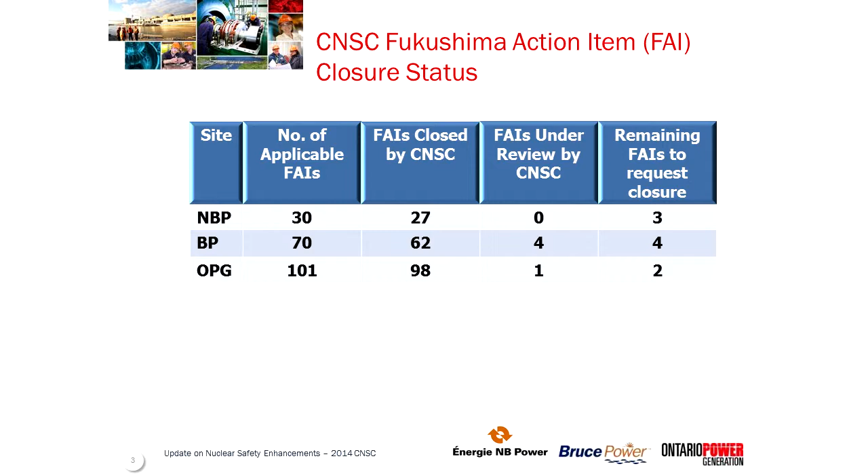We approached the lessons learned from Fukushima in a systematic way, guided by the CNSC and national and international common strategies. The industry is conducting evaluations of the potential external hazards at our plants, design basis and beyond design basis. While we recognized that our plants were safe, improvements could be made to be able to respond in the extremely unlikely event that all of our installed backup equipment is not available.

Therefore, we have added portable emergency mitigating equipment, pumps and generators, to add an additional layer of defense. This installed equipment gives us the capability for portable pumps to add water to the boilers, irradiated fuel bays, heat transport and moderator systems to cool the core, or portable electrical supplies to repower critical instrumentation in the event of a beyond design basis accident. We are adding more equipment to enhance our capability and are installing quick connects to streamline the deployment of the portable equipment and enhance containment protection.

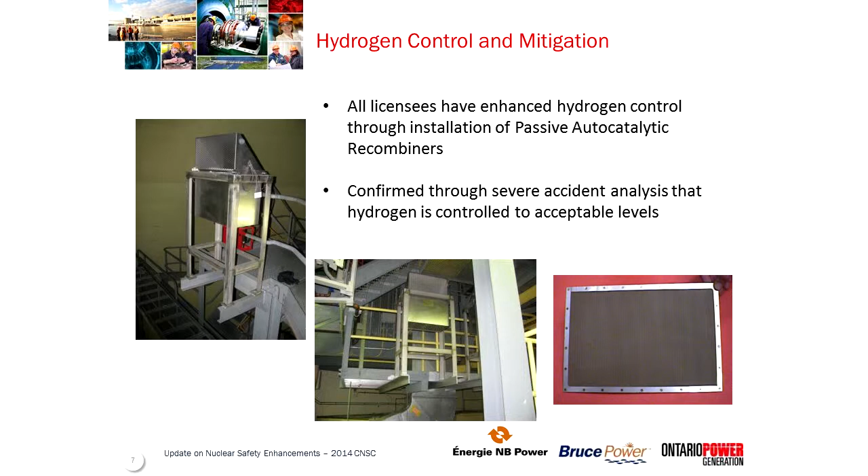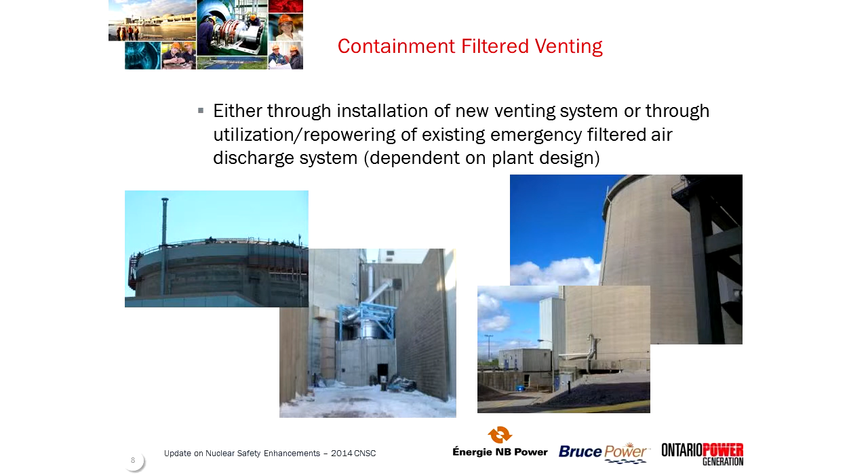Containment integrity is preserved either through the installation of new venting systems, the Point Lepreau containment filtered venting system is shown here on the left, or through utilization or repowering of the existing venting systems, such as the emergency filtered air discharge system, or the Pickering EFADS, shown here on the right. Containment pressure control and cooling is also preserved through SAMG actions, and for some sites, through repowering containment air cooling units.

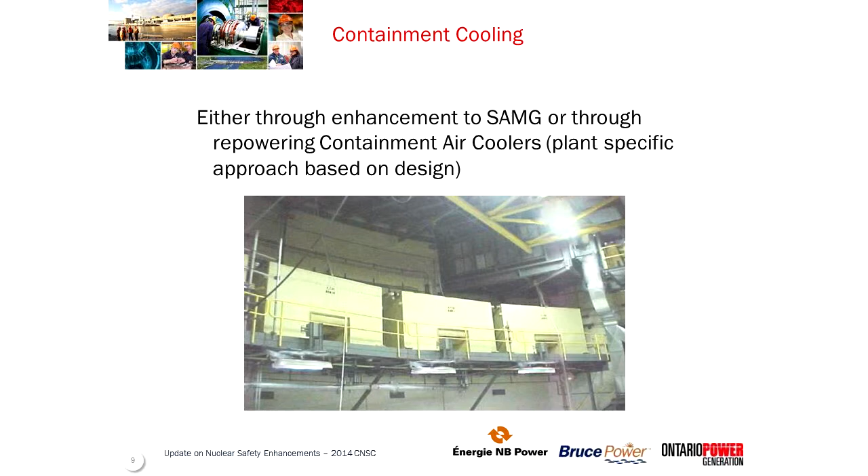All of the improvements we are placing in service are being tested through training and emergency preparedness drills and major exercises. Bruce Power conducted a major exercise, the Huron Challenge, in September of 2012 with over 50 organizations participating.

In May of this year, OPG completed Canada's largest nuclear emergency exercise with more than 1,000 participants from 54 federal, provincial, and municipal agencies. The primary objective of this exercise was to assess the integration of nuclear emergency plans for those agencies that would be required to respond in the event of an accident. OPG is planning to return to a CNSC meeting in November of this year to provide the Commission with an overview of our findings.

At all sites, emergency mitigating equipment drills and severe accident management drills are being added to the drill program. I mentioned two major exercises being complete, the Huron Challenge at Bruce, and Exercise Unified Response at OPG Darlington. But further drills are planned with a Beyond Design Basis drill at Pickering scheduled for the fall of 2014, and a major exercise at Point Lepreau, Exercise Intrepid 2015, which is planned for November 2015.

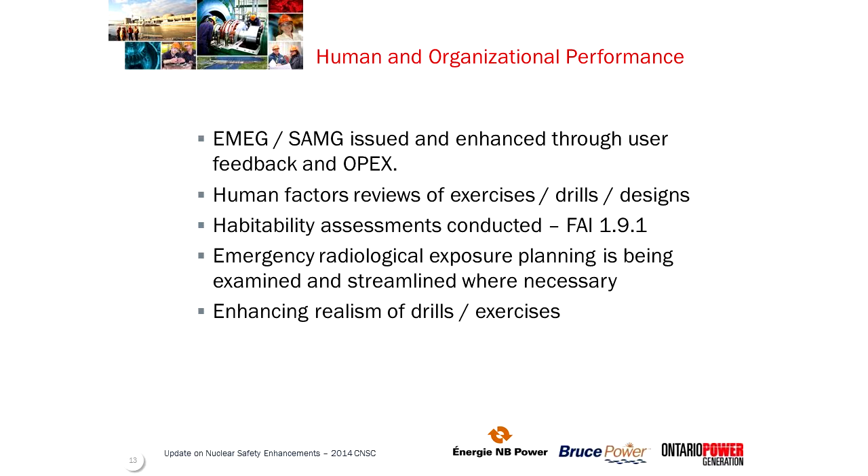We have also recognized the importance of decision-making processes as we transition from a design basis scenario to a beyond design basis. In such cases, we transfer from a rule-based operating regime to a knowledge-based response, basically from procedures to guidelines. Three elements feed into the prioritization and decision-making process that must be used as we make this transition: critical thinking, a bias towards action, and the authority to act.

We are continuing to work with leadership at the stations to ensure that we provide opportunities for them to practice and discuss this important aspect of accident response. We have developed and are continuing to support this with tools, training, and exercises. Our experience has been that staff are very receptive, and they've been providing us with suggestions for further enhancements, which we are implementing.

The Canadian nuclear utilities are providing important inputs to the continuing evolution of practices and regulations, building on the lessons learned. CANDU Industry Integration Team, or the CIIT, which is coordinated through the CANDU Owners Group. This team facilitates working closely domestically and with our international CANDU partners and gain from their perspective. We have conducted benchmarking visits and assessments to capture OPEX and lessons learned.

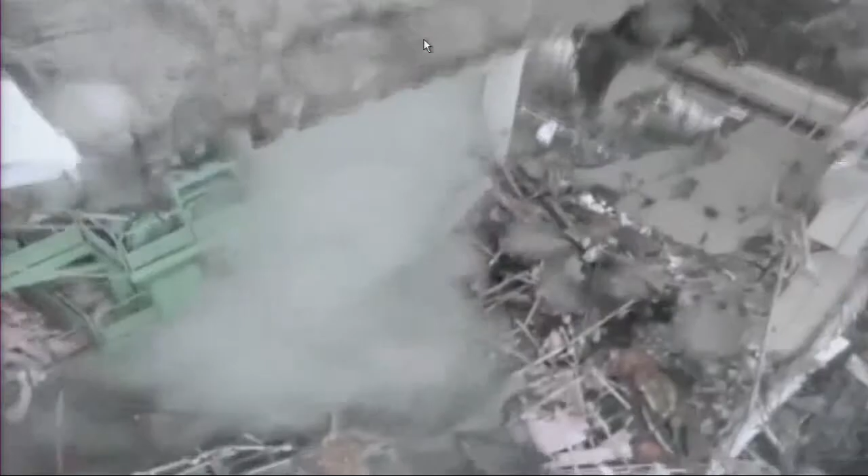One of the considerations with natural disasters is their unplanned nature. Fukushima was an extreme weather event. The site at Fukushima was consequently damaged because of their inability to cool fuel after the event occurred. Nuclear plants are already well designed and they have many redundant systems for any kind of conceivable event that can occur. So the question then is, what went wrong at Fukushima and why? Everything worked properly until the actual tsunami hit. That then took away that supplementary power. It also flooded the basement, which had a lot of switchgear and critical equipment in it, which then precluded them from getting backup power back into the plant.

The biggest thing for us immediately after Fukushima was to go and look at our own defenses in the event of severe weather. Obviously, a tsunami off Lake Huron is very doubtful, but a tornado or a bad winter storm is not. Based on Fukushima, then, we took a number of actions. We ran what we call a probabilistic safety analysis, looking at what could be possible and what could not. What if you missed something? What if an event that you didn't think was going to happen happened? What impact would that have? And how would you be certain that you could respond to it?

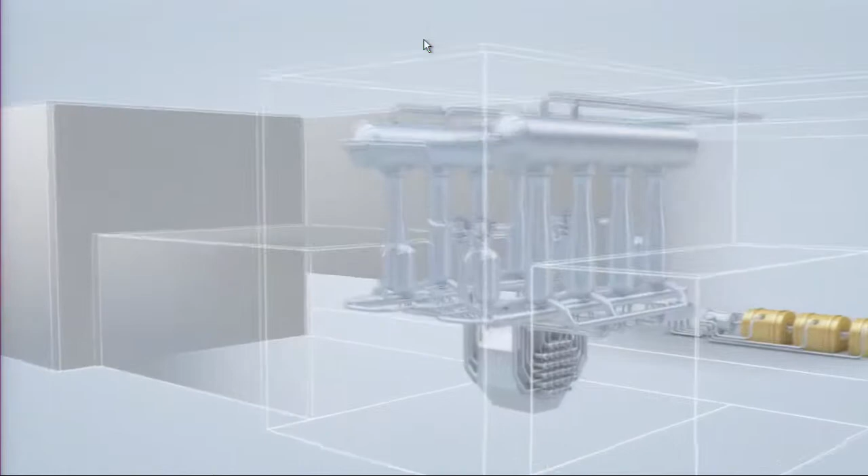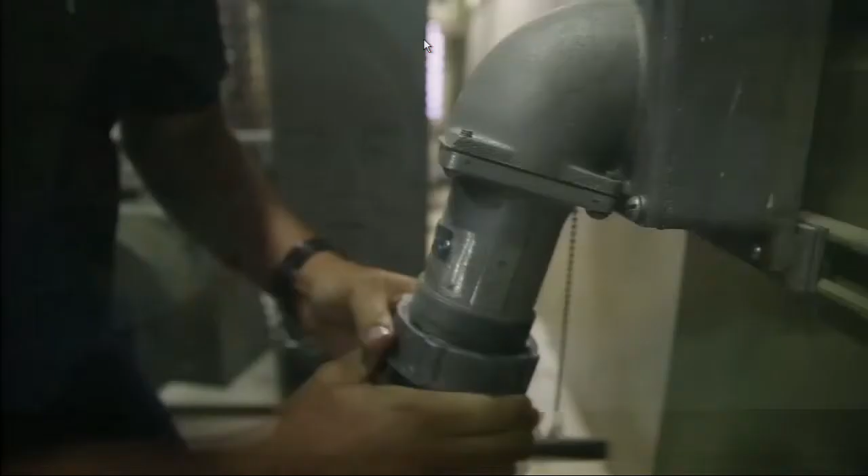The CANDU design is, of course, very robust and has been proven over many years. However, it still seemed prudent to add extra layers of defense. So the first step was, in fact, to make some modifications internal to the plant to add some extra connection points that we could use to add the extra cooling water and the electricity. The second point was to develop a means of deploying equipment that would actually provide the water.

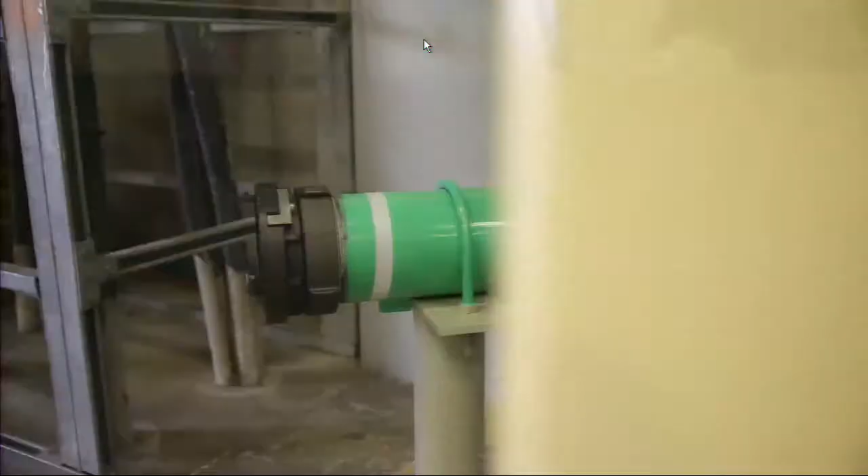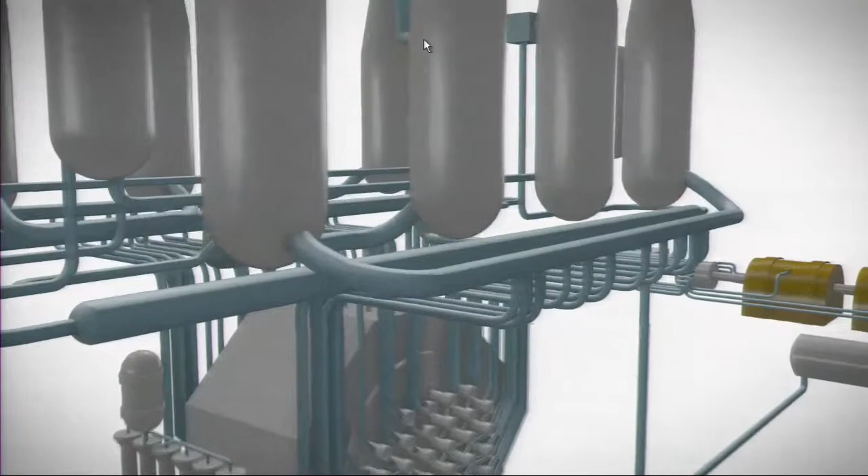By design, the CANDU system has two safety systems. Each are independent and diverse. So if one happens to fail, the other one would be available. Of course, we keep both systems healthy and active and poised and ready to go. Shutdown system 1, for example, on a loss of power, all the rods go in. And on shutdown system 2, on a loss of air, all the poison goes in.

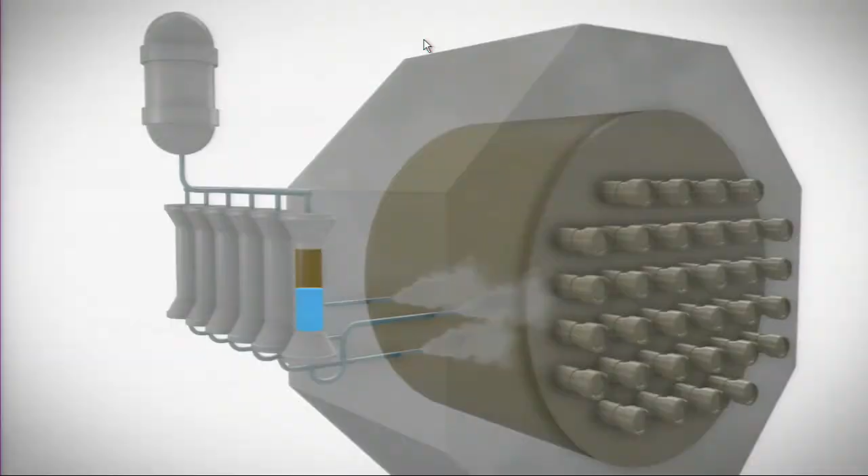So they're fail-safe systems that don't require operator intervention in the event of a parameter trip. That's a key difference where operator action is required to actuate those safety systems. For every single accident that's been diagnosed by our safety analysis folks, there are 4 different trip parameters that could take that down, 2 on each shutdown system. So there's a ton of redundancy to take a unit offline based on any accident that can be postulated by our safety analysis group.

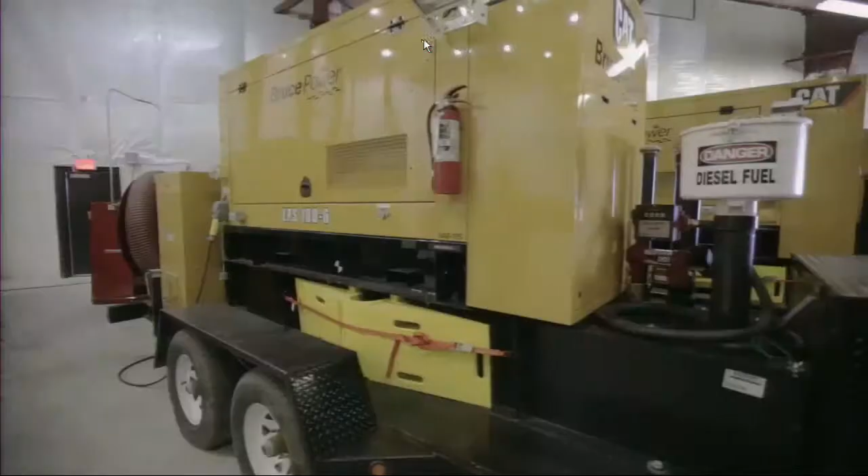We have existing standby generators and emergency power generators that are part of the plant design. There are also other backup power systems. We have diesel generators that back up our Class 3, and then we have other diesel generators that back up our qualified power supply. And we realized that if we lost all of our fuel tanks, we needed another backup. They're in place to make sure that if we have a loss of Class 4 power or other power losses, that power still gets to the critical parts of the plant.

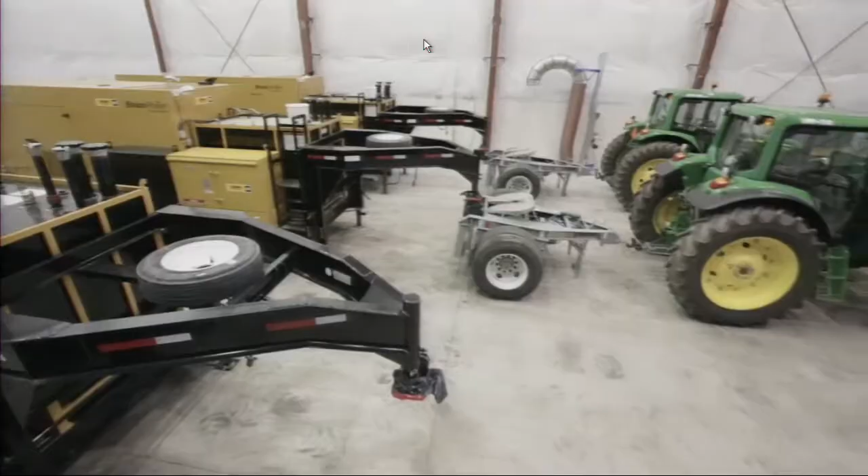We also have emergency water. It comes to the station, connects to the emergency boiler cooling piping, and it can supply any unit. So we store that in a place where it would be remote from the actual plant. So if you have an event at the plant, and as we drilled during the Huron Challenge, we simulated a Goderich-style F3 tornado working its way through the site. Because that equipment is held separately, it's not going to be damaged as a result of the natural disaster scenario. If that storage facility were to be hit, it's very unlikely that the plants would also suffer the same fate. So there's new equipment, but more importantly, everyone's trained in how to use it.

We've developed a new off-site monitoring system out to 10 kilometers, which will automatically detect any radiation released. And in fact, it'll operate 24/7, whether there's an event on or not. But this will provide very accurate and detailed tracking of any radiation that might be released in an emergency, thereby allowing the government to easily move people out of the way. What this system does is it helps augment our current system that we have in place in terms of TLD chips. So we do have approximately 105 TLD chips within the 10-kilometer primary zone around the site. That provides us a very deep spectrum of any radionuclide, so the sensitivity of these detectors is quite amazing.

Since Fukushima, Bruce Power has done a lot of work in this area in terms of public notification. We're looking at expanding upon what we currently use in terms of telephone call-outs and sirens and these sorts of things to local FM radio stations. We've looked at pushing that same message through local cable TV as well. We've discussed with Environment Canada broadening that to include marine radio. We're also working towards cellular SMS texting. So we're looking at expanding into a more robust system that not only provides a signal but also a message to people so that they know what to do.

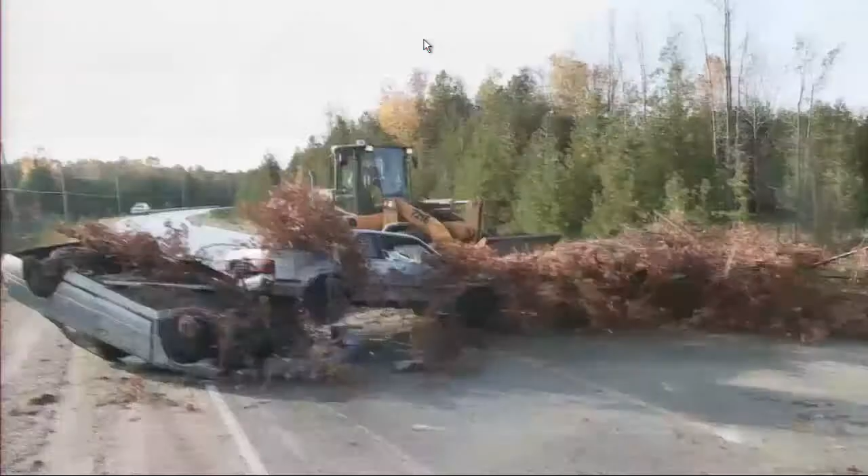We designed, developed, implemented and delivered new training to a new 5-crew approach at Bruce Power, and we're looking at the use of tabletop exercises to keep crews engaged, as well as self-directed learning and these sorts of things. In Huron Challenge, we considered things like tornadoes and earthquakes, and we have the equipment which can fill in holes or move trees or cars or anything that's blocking the road. We have more than one way of pulling water out of the lake, so we're reasonably comfortable that that will work.

Our program for the Fukushima event, really a simple concept. We're taking everyday pieces of emergency response equipment, such as fire trucks, and we've trained our staff to be able to deploy them in an unconventional method. So really, instead of fighting fire, we're making connections that are hard piping onto the stations themselves to provide cooling in a very timely fashion to be able to ensure that the reactor cores remain cool and the fuel bays remain covered with water.

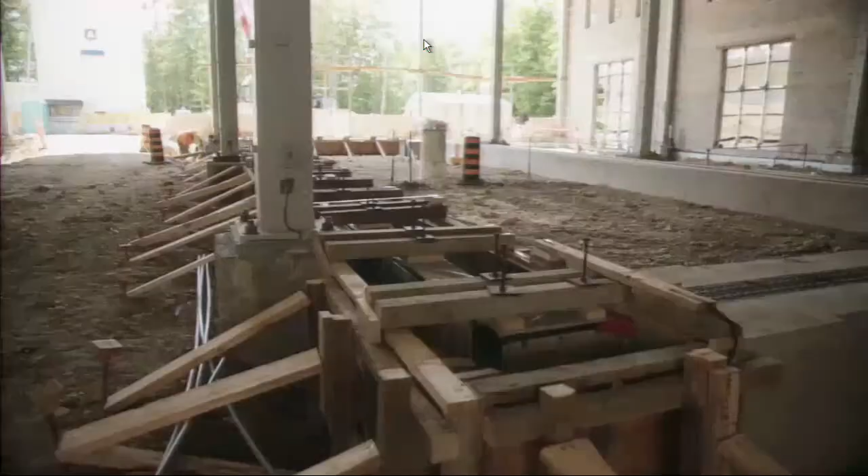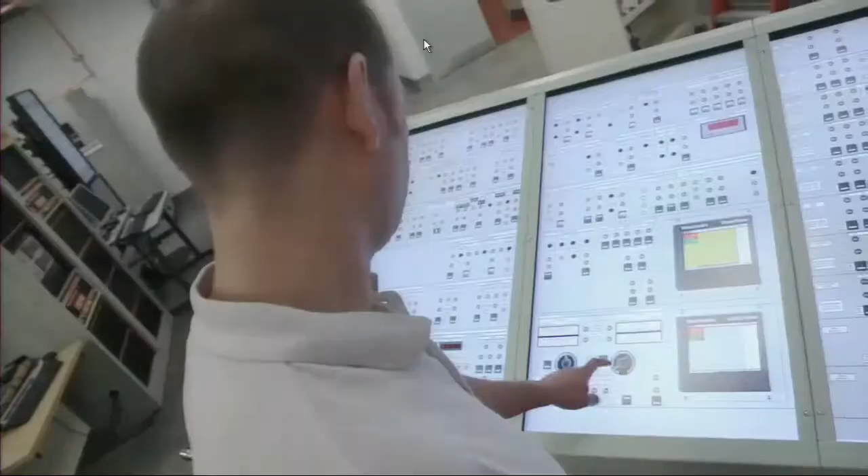Bruce Power undertook to rebuild the fire training facility, which was closed down a number of years ago. Every display that was incorporated into the design of this facility is all deemed to be a risk to a nuclear facility. The design of this facility is somewhat unique. We are going to have the capabilities to have live fire training 365 days of the year. Bruce Power spends a lot of money and time training certified staff, and all its staff for that matter, to the point where you understand the theory and the design of the systems, not just the operation.

Well, the incident management system consolidates our emergency response approach into one command center. It enhances the coordination, communication. So if there was a fire alarm within the station, there is a call that goes out to the Emergency Protective Services Organization. The Emergency Protective Services Organization are then tasked to provide response capabilities for both power as well as water supply through the fire trucks. We respond to the station and provide the water and power as needed.

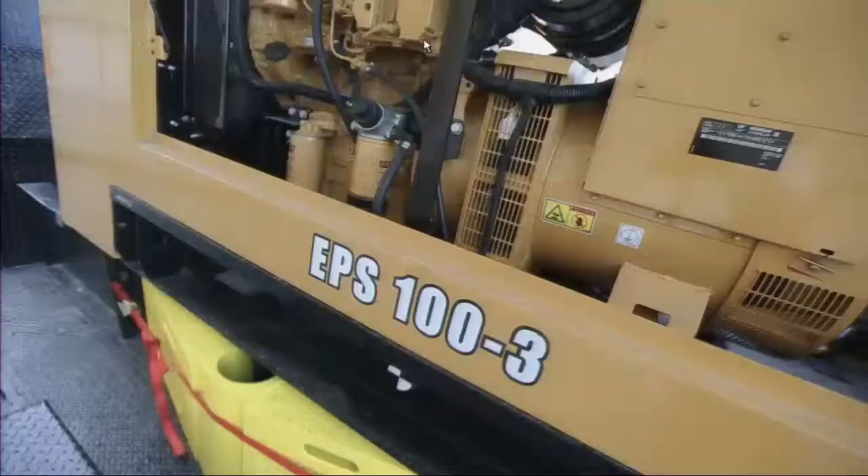It allows us to respond basically to an all hazards approach to any hazard that we could experience on site. IMS is the system that's used for management in Ontario. It's adopted by the province and all the provincial agencies. So this allows us all to work together seamlessly.

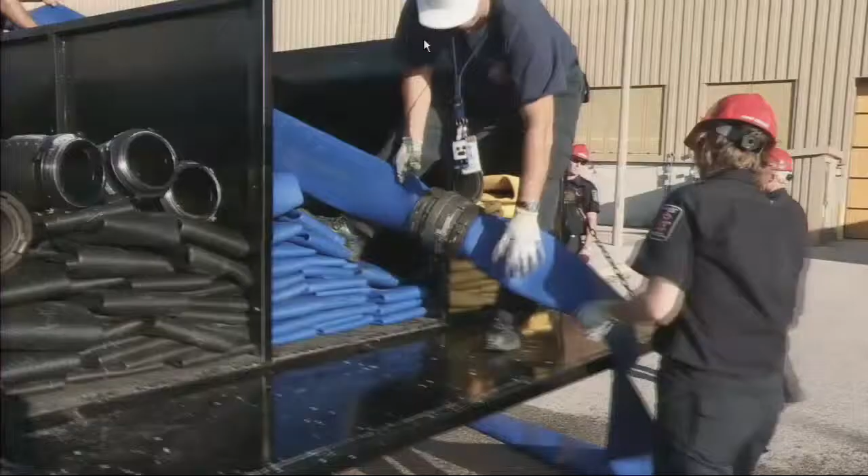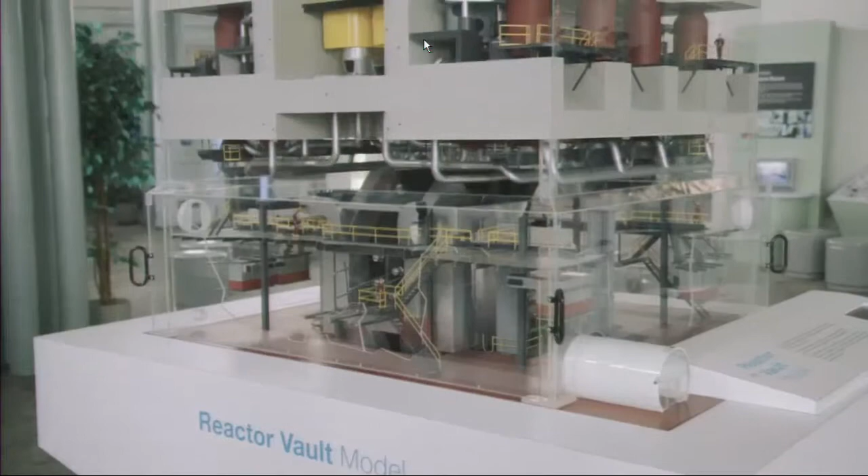We feel that we've taken the Fukushima events very seriously, applied the lessons actually in a much broader sense than we would have applied in Fukushima, looking at not just those kind of events, but just any kind of event that might occur. We think our crews are well trained, they're on standby 24/7. So we feel that we have the capability in place to deal with virtually any emergency that will come our way. We certainly invite you to drop by our visitor center and have a closer look at the plant and the site and the facilities here. And I think you too will walk away with a level of confidence that the place is well looked after and we're well prepared.

But that's the intent for our public information. So it's on display now at our visitor center and it's on the website. A little bit long, but we wanted to kind of talk people through the process. So hopefully it was effective. And now turn it over to Paul at Point Lepreau.

Thank you. For the record, Paul Thompson, Manager of Performance Improvement and Regulatory Affairs at the Point Lepreau Generating Station. NB Power has expended considerable resources in the area of understanding and being prepared for severe accidents. This started as part of our life extension activities integrated into our refurbishment project, which put us in good stead prior to the accident at Fukushima Daiichi. And since then, again, in collaboration with our other nuclear Canadian partners, a lot of activities since the accident at Fukushima.

I agree with Mr. Saunders that this is a very difficult subject area because it's quite highly technical, and quite often in trying to address some of these accidents and discussing the phenomenology and how we respond to them, it is a very confusing and challenging subject area. So I think this is a great video, Frank, and I think it really does help.